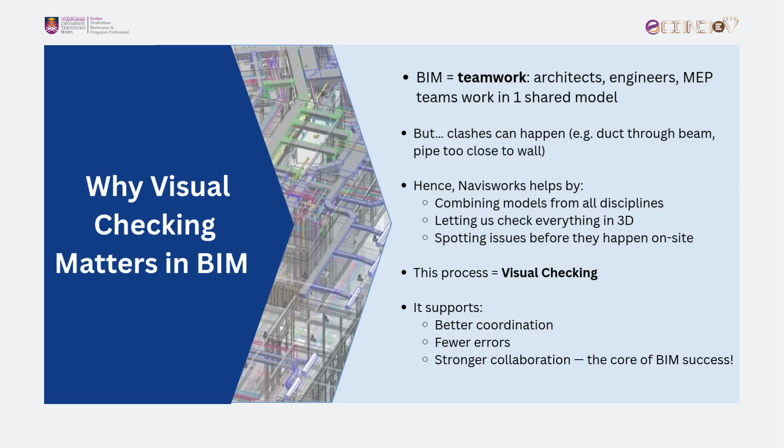Understanding how to navigate and interpret a federated model, detect issues early, and communicate effectively with a multidisciplinary team, these are real-world skills that make you industry-ready. In short, learning BIM as a process, and especially the practice of visual checking, gives students a strong foundation to take on roles in modern construction projects with confidence and competence.

Now let's look at the 3 main steps involved in visual checking within a BIM workflow. Step 1: importing and setting up discipline models. Step 2: visual checking with sectioning tools. Step 3: mark and save key issues. These 3 steps form the backbone of visual checking in BIM, helping us identify issues early, improve collaboration, and reduce costly on-site errors. Next, we'll begin the hands-on tutorial.

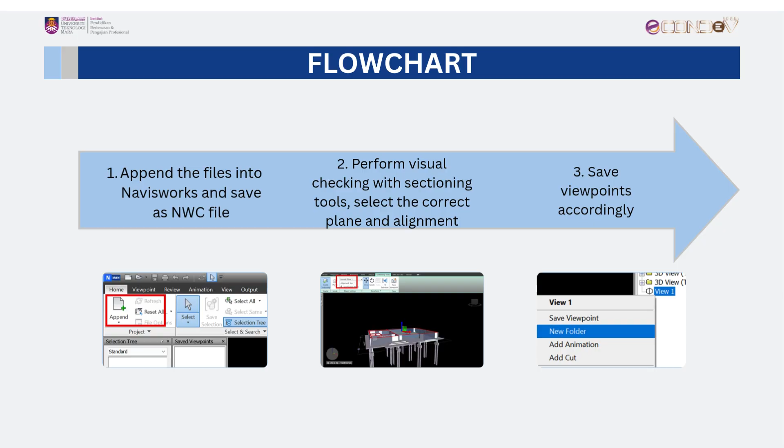In this session, you'll get the opportunity to practice visual checking yourself. We'll guide you step by step, from importing the models, navigating and inspecting the 3D environment, to marking and saving identified issues. This is a valuable skill to prepare you for real-world BIM project collaboration.

Select the file you wish to append into Navisworks. Please make sure you have selected the correct file. For this video, we will be selecting the NWC file.

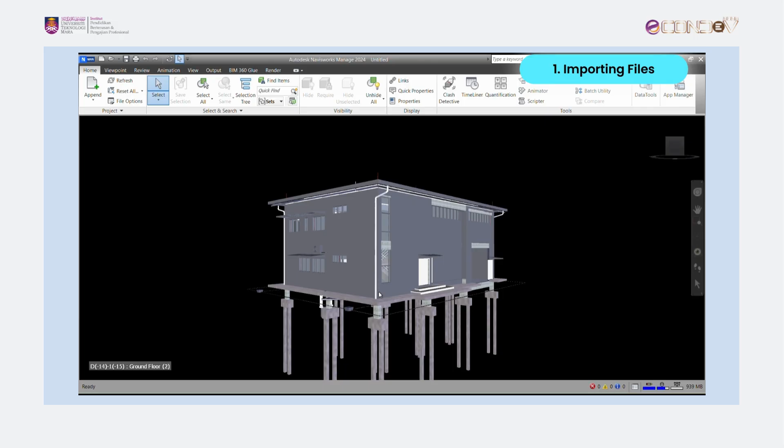Once all discipline files have been added, rename and save the working model in the Navisworks file format, or NWF. Please note that in the NWD format, further changes cannot be made as it is in read-only mode. This format is used to review and coordinate models together within a single file.

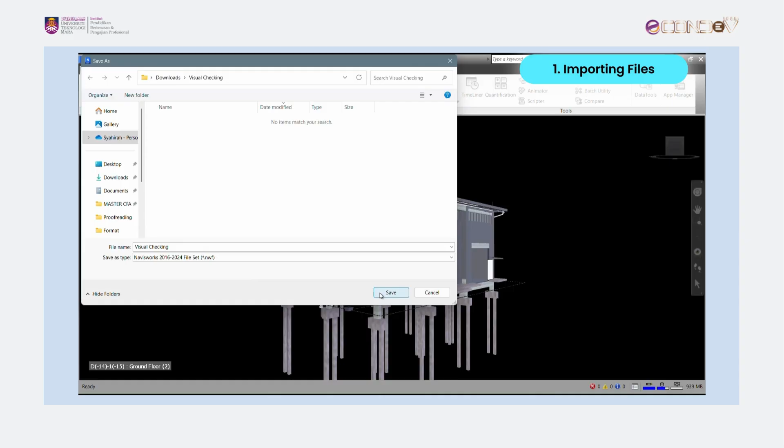With the combined models open in Navisworks, visual checking can begin using the sectioning tools. These tools allow you to cut through parts of the model to inspect internal elements that are not visible from the exterior view. This is helpful when identifying clashes or checking detailed areas.

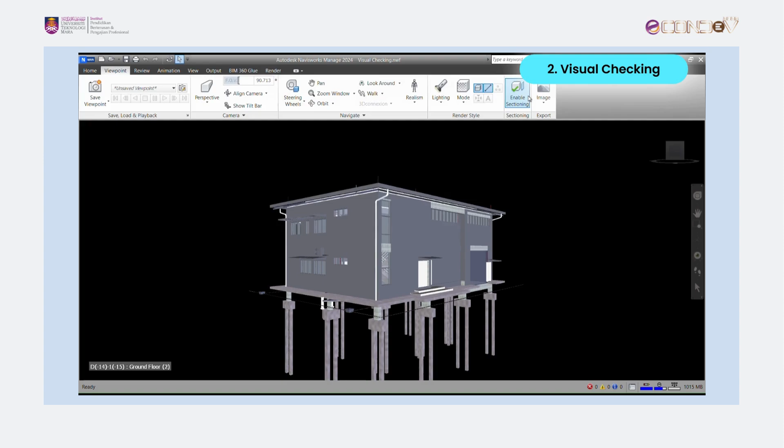To begin, go to the Viewpoint tab, click Enable Sectioning. Click the bulb icon next to Plane 1. Then choose your preferred alignment and adjust the view as required.

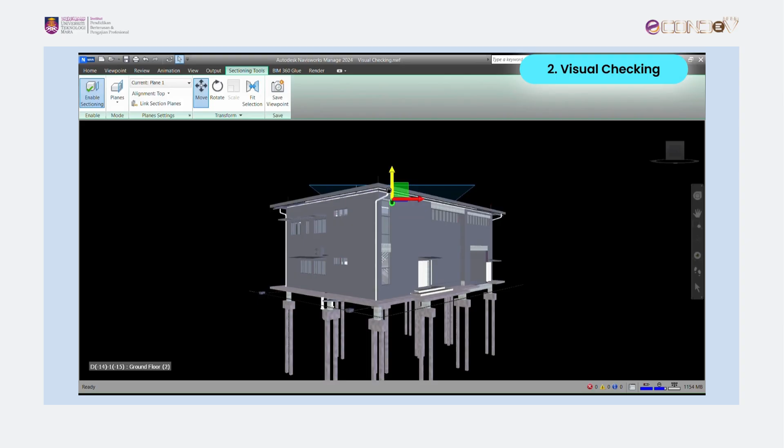Use the blue arrow to move the section plane and examine different parts of the model. Alignment allows you to view the model from above by dragging the arrow downward. The Align to View option adjusts the plane to your current perspective. Meanwhile, Align to Surface matches the section plane to a specific surface within the model. These functions allow flexible viewing angles and help users inspect coordination issues from various directions.

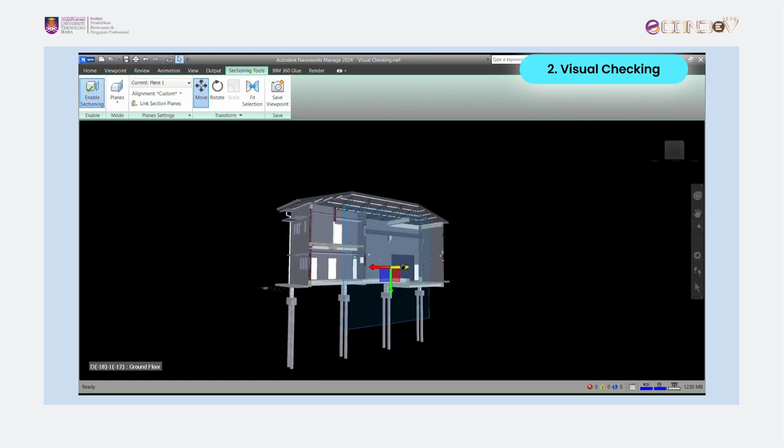Next, saving the view allows you to refer back to it later or share it with the team. Click Save Viewpoint under the sectioning tools. The saved views will appear in the Saved Viewpoints tab. Rename them clearly. Repeat the same steps for other viewpoints.

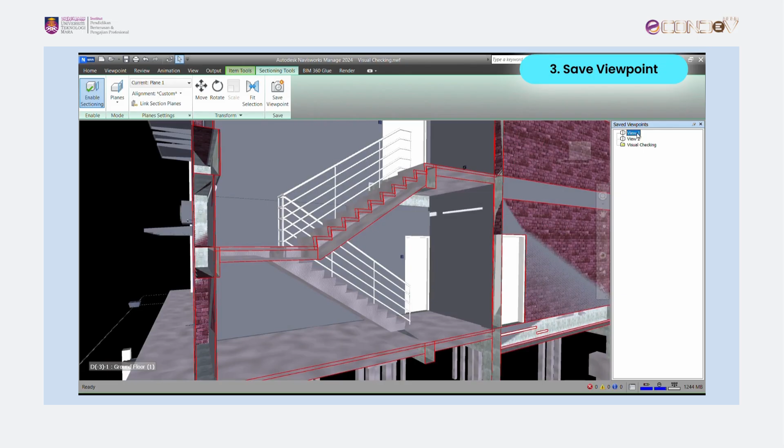Finally, organize them into folders if needed for easier access. Saving viewpoints is useful during coordination meetings. It allows teams to focus on specific issues and helps streamline the discussion process. By documenting key views, the team can track problems more effectively and ensure resolution before construction begins.

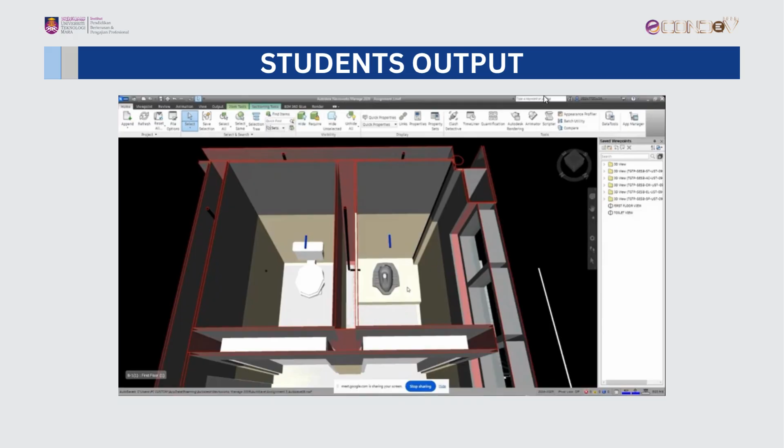This output represents a BIM visual model created using design tools and reviewed in a BIM viewer. It integrates architectural, structural, and MEP components in one environment, allowing users to assess spatial planning, design clarity, and buildability. While no clashes are found, the model improves understanding of system interactions.

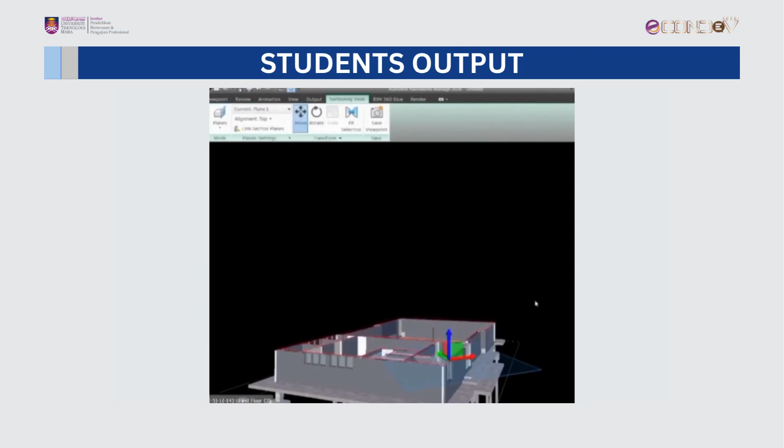Through this task, students explore the basics of creating and interpreting BIM visual models. They learn to navigate, isolate elements, and evaluate design logic. This experience builds essential digital skills for modern construction, preparing learners for data-driven environments where visual clarity and model-based communication are key industry expectations.

Let's wrap up with a quick summary of what this module is really about and, more importantly, why it matters. This module introduces students to the fundamental concept of building information modeling, BIM, as a collaborative process, not just a software. It emphasizes the importance of digital coordination in the construction industry, where models from multiple disciplines are integrated in a shared environment.

One key task is visual checking, a practical method used to identify design clashes, misalignments, and other coordination issues early in the project lifecycle. By detecting these errors before construction begins, teams can avoid costly rework and ensure smoother project delivery.

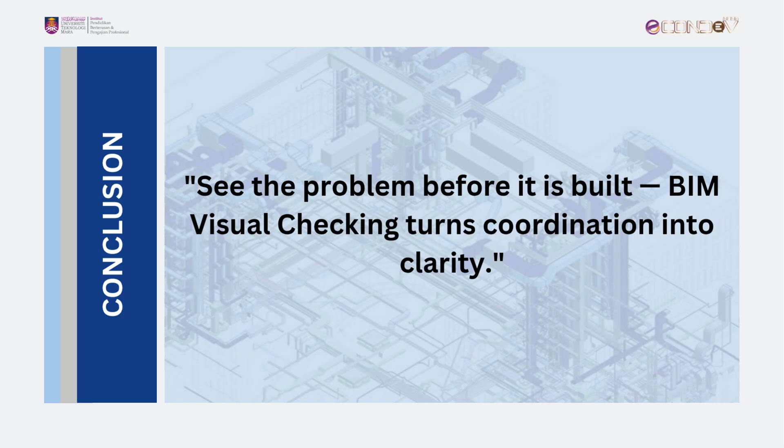Through hands-on tutorials, students gain real-world experience in navigating 3D models, performing visual checks, and managing coordination using BIM tools. These activities simulate actual industry practices, preparing students for roles such as BIM coordinator or project engineer in BIM-based environments. The skills developed in this module, technical, analytical, and communication, are highly valued and will give students a competitive edge as the construction sector continues to embrace digital transformation.